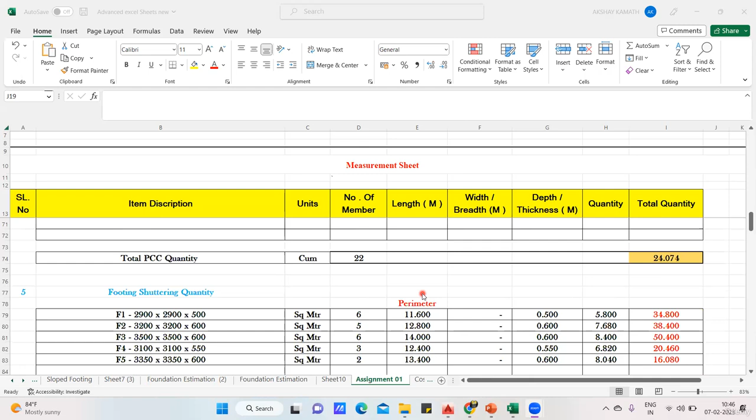Okay, maybe somewhere there was one mistake I did. In case of footing concrete quantity, I had got the answer 40, but I hadn't done the proper calculation. I forgot to multiply these three quantities, so I was getting 40 cubic meter, but the right answer is 129.374. After that I went through all my calculations, and this is the final calculation I've done, and you should get the same answers.

So quickly I'll run through this once. These are the 5 footings I had written. It is earthwork, so the unit should be cubic meter. The numbers are 65632, and this is length, after adding the working space and the PCC offset to that. Depth, thickness, quantity - so excavation quantity is 688.339 cubic meter.

Then after that come to the stone soling. Again, stone soling unit will be in cubic meter. You'll get answer of 36.110 cubic meter. Then we don't have sand filling here.

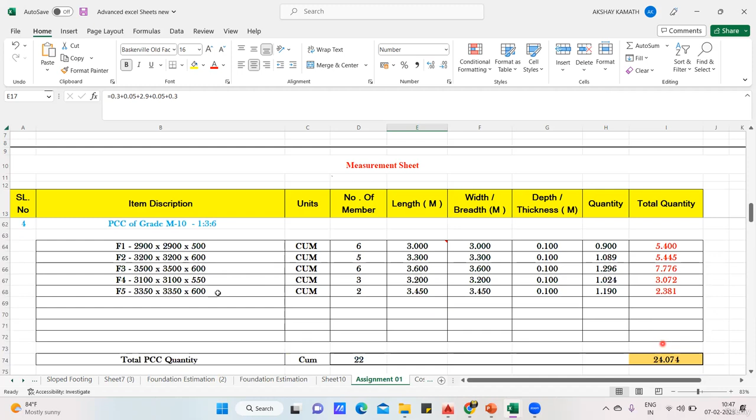Then we have PCC of grade M10, which is 1:3:6. And so here also you'll get the total PCC quantity of 24.074 cubic meter.

Then the footing shuttering quantity will be 160.14. So your perimeter we have got and height we have. So the total area will be 11.6 into 0.5. And based on that, I've done this calculation. You have got 160.14 square meter as my footing shuttering quantity.

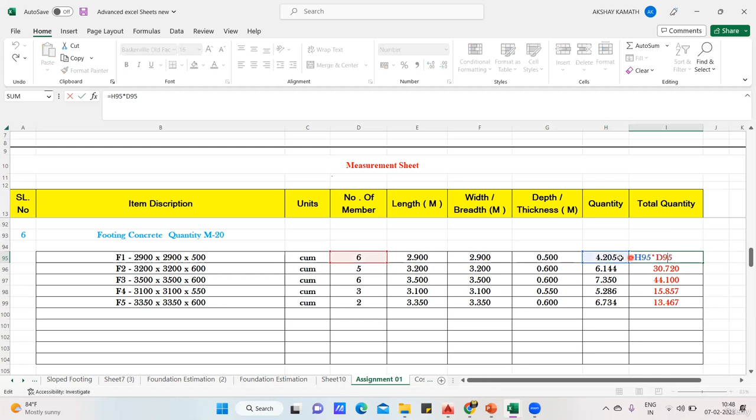Then my footing concrete quantity, again it's a concrete quantity, so it will be in cubic meter. So this is the answer what I've got. Quantity will be 2.9 into 2.9 into 0.5. So 4.205, multiplied by 6 will be 25.230, and when I drag it, I'll get all the answers. So the total footing concrete is 129.374.

Next, in the shuttering work of neck column till the plinth beam top - so here I've written plinth beam top. I've explained how this height has to be taken. So 1.8, then the footing depth I've deducted, and then I've added the depth of the plinth beam to that. With this, I'll get 1.8 into this answer giving 3.240, and the total shuttering will be 3.240 into 6 giving 19.440. If I drag it in this way, I'll get the total shuttering quantity up to the plinth beam top I'm taking. The unit is square meter, so it is 68.670.

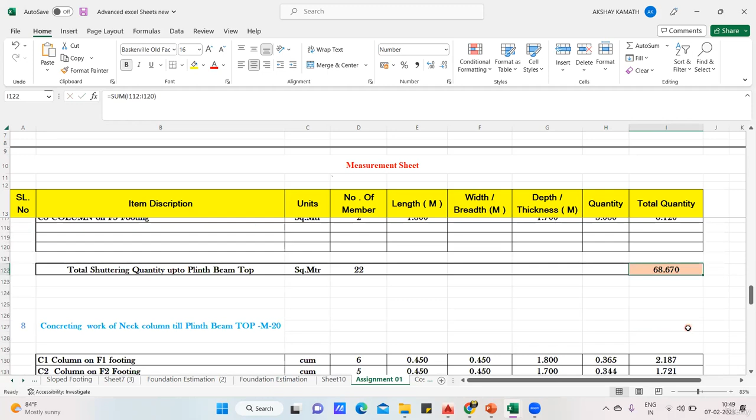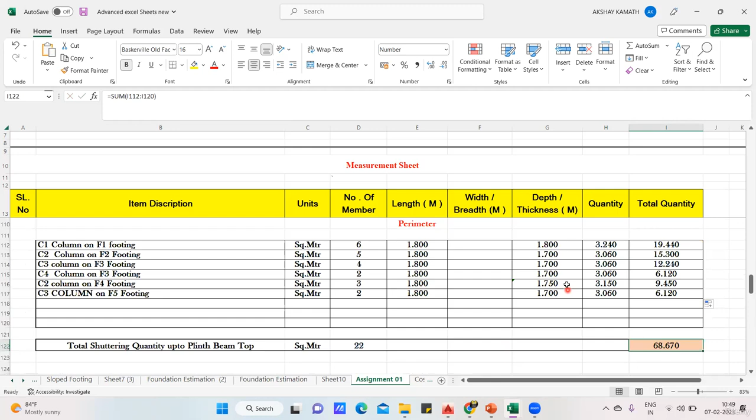Next, once the shuttering is done, we have to do the concreting. Again for the concreting, your foot is this thing. The column size is same here, 0.45 into 0.45, and height is again same. Wherever you do just shuttering, the same height will be your concreting height. So this will be 0.45 into 0.45 into 1.8, and total quantity will be 0.365 into 6. When you drag it in this way, it will make sure it is taking all the answers correctly. So here the total concrete quantity of the neck column you are going to get.

One mistake - not mistake here - I should write cubic meter. Always try to check the units, because while explaining sometimes I may not write it, sometimes I miss it, but that is okay. You people should not do that mistake. So this is 7.725 cubic meter of concrete required.

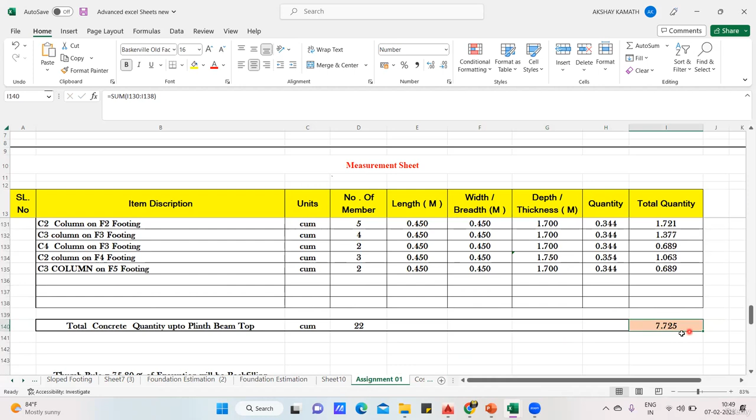So whatever we did now, this is up to the plinth beam top. But if you remember, I told you backfilling we are going to do till the bottom of the plinth beam only, and after that the plinth beam will be casted, then the remaining backfilling will be done. So if you take this concrete quantity also, it's okay, but if you want to be more precise, you should calculate the concrete quantity till the bottom of the plinth beam. So that is what I have done here.

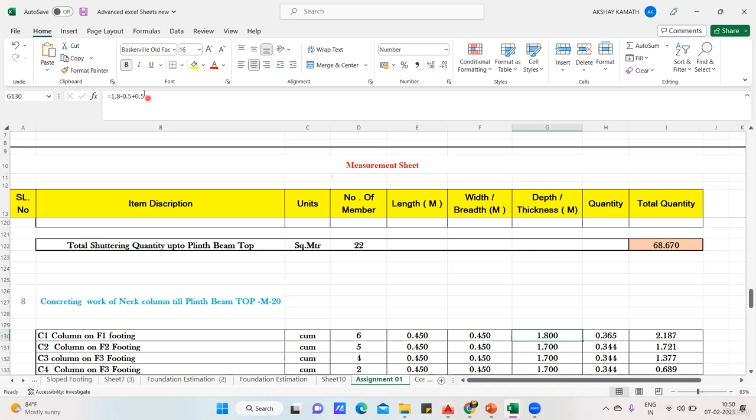So whatever I have written here, this is concrete quantity up to the plinth beam bottom I have taken. So this was top and this is bottom. Nothing will change, everything will remain the same. Only the height point - in the height we had added the depth of the plinth beam, that is 0.5. Everywhere we added 0.5 because this was including the height of the plinth beam. But actually when you do the backfilling, it will be till the bottom.

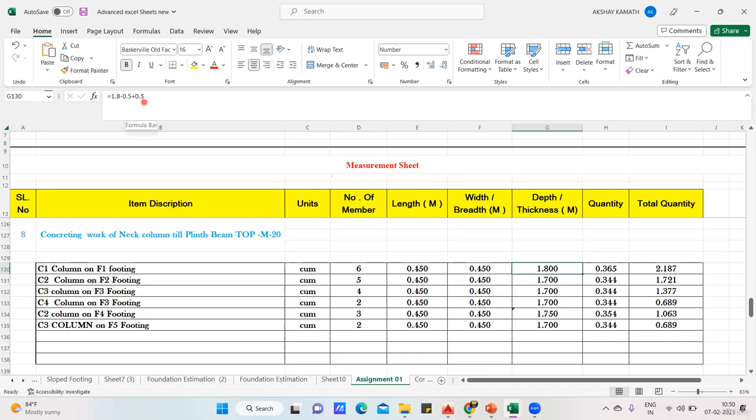So what I've done, from that height I've deducted the 0.5. Here it was 1.8 plus minus 0.5 plus 0.5, so this 0.5 I've taken out. That is why I'm getting 1.3 here. Just do the calculation wherever applicable, deducting 0.5 in all the cases, and accordingly you're going to get the answer. This is the real quantity of the concrete column which will go up to the bottom of the plinth beam. If you want up to the top of the plinth beam, it will be 7.725.

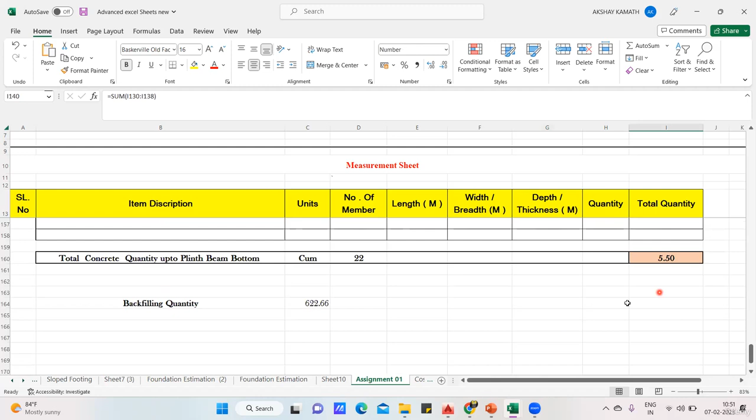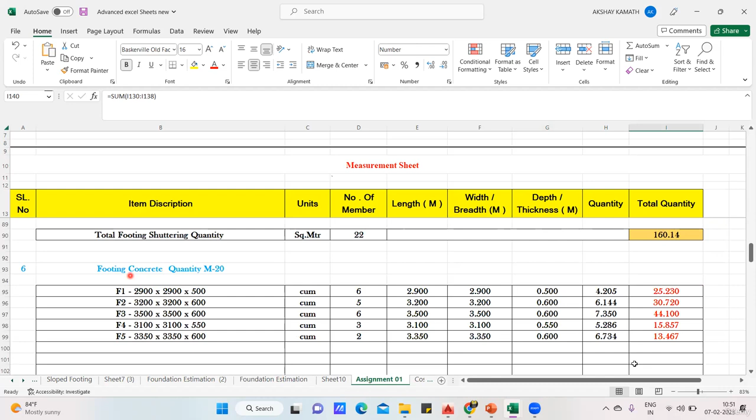That's it. And after that, the backfilling quantity will be how much? Whatever is my excavation quantity - so my total excavation quantity is 688.339. From this total excavation quantity, if I deduct my stone soling quantity, if I deduct my PCC quantity, that is 24, if I deduct my footing concrete quantity, which is 129.374, and if I deduct my column concrete quantity - but in column concrete quantity you should take the one which I've done up to the bottom of the plinth beam, that is 5.50.

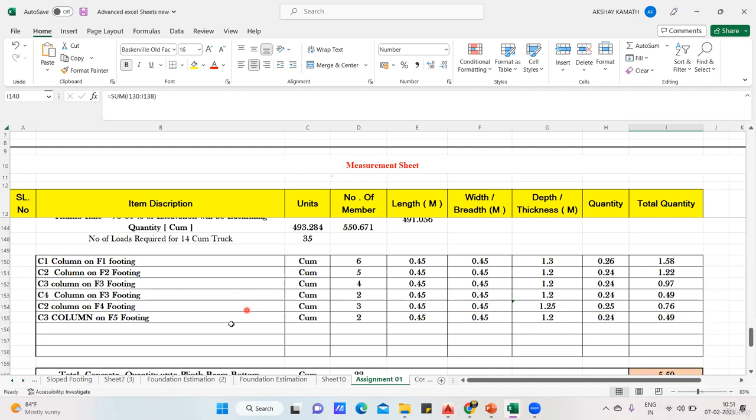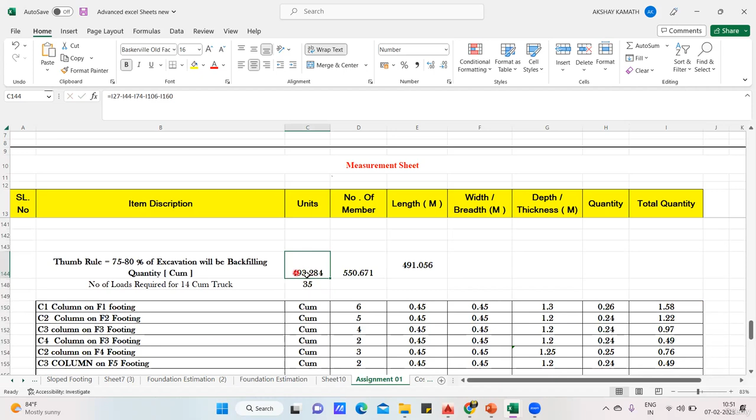So this will be... wait, yeah, got it right. So why is this 491 coming? For 491, I took the column height till the top of the plinth beam, so it is a little less. That is 491. Here the 493 is coming. That makes sense.

And this 550 is what? I've taken 0.8. Even you can take 0.75 also. If you take 0.75, it is coming 516 cubic meter of backfilling. But in practice, what has happened, it has come to 493.

So this is a thumb rule. If somebody asks you, you can say 0.75 to 0.8. One more thing I want to add here.

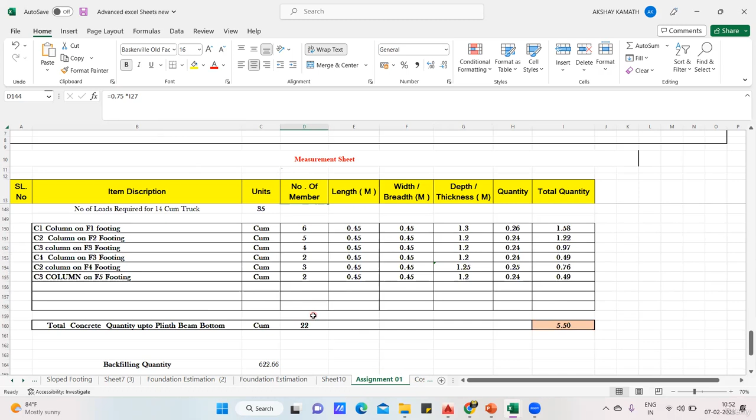Whatever backfilling we have done, this is not a compacted backfilling. You're getting my point? When you do the backfilling, you are going to compact, isn't it? You're not going to directly dump. So whatever volume I have got, this is actually the volume when you do the dumping.

But when you do the compaction, again this quantity will increase. Remember one more thing I didn't explain in the previous lecture: whatever backfilling quantity you are getting, you add another 35% extra to that. This is after the compaction.

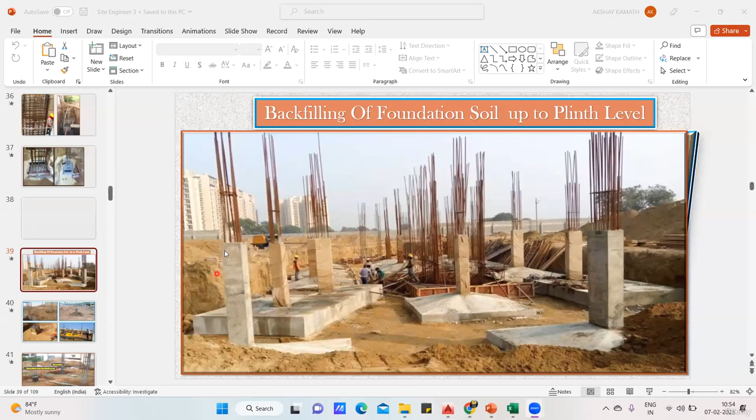If you're not able to understand, let me explain. Once you backfill the soil, it's not that directly you're going to dump the soil. When you're dumping the soil, it will be something like this: you'll dump the soil, do the compaction, then again dump the soil, do the compaction.

In layers, if you remember, we are supposed to do the backfilling. So when you do the backfilling in layers, every time you're doing a compaction, isn't it? That means more amount of soil will go. You're getting my point? More amount of soil will go.

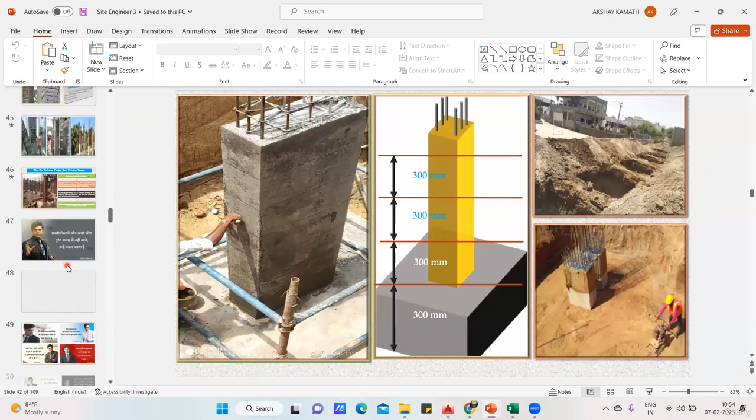But according to calculation, if I come here, it should be 493. But this is actually loose soil, you haven't done the compaction. So when you do the compaction, you can assume a thumb rule.

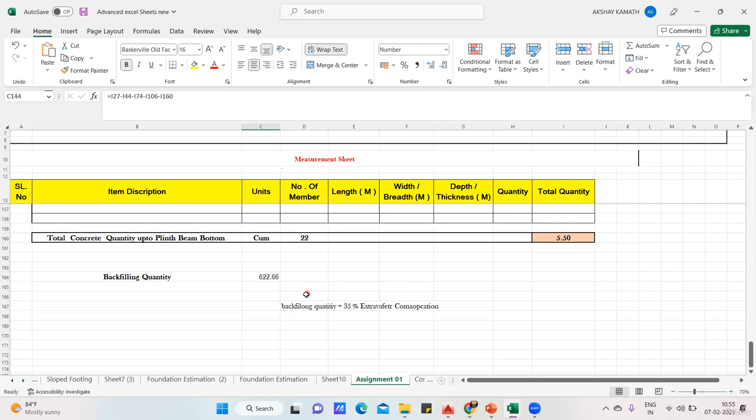Whatever quantity you got, for this again you take 35% extra. So that will be your actual backfilling quantity. That means 493, whatever answer you have got, isn't it?

I'll write here, I'll do it here. Total backfilling after compaction. After compaction, because more amount of soil will go once you do the compaction. More amount of soil it can take, isn't it? So for this I'll write the answer here.

So how can I do this? Whatever answer I got, I'll multiply this by 35, so 1.35 I'll do. 35 means 1.35, so the actual backfilling will be 665 cubic meters of soil will go as backfilling. This is on the paper, but practically on the site, you'll require more soil for the backfilling once you do the compaction.

So why am I taking this 1.35? Because of 35%. Now from where did I get this 35? Again, this has been observed on site for a very long period of time, so people have seen that roughly it's 35%.

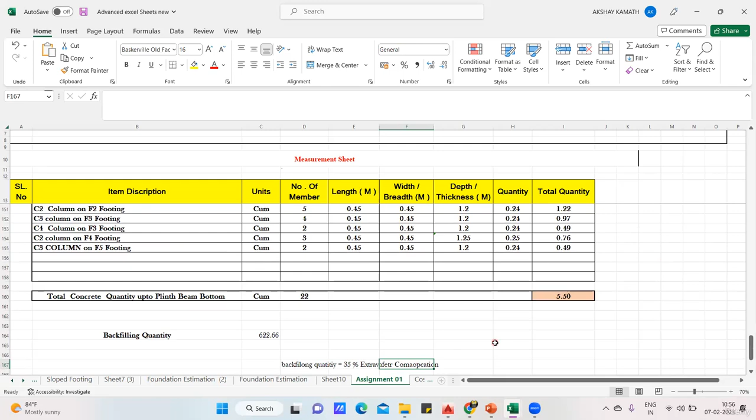Now you may question, should I always take 35? No, you can take 30 also. It depends on the soil also, no? Maybe if you're taking some murram soil or something else, there the compaction may happen enough, I mean more compaction may happen. If you're taking some other soil, the compaction may be little less.

So again, everything is project specific. Since we are doing an estimate, I require a rough idea, so that is why I've taken 35%. You can take 30% also, it doesn't matter.

If you don't want to do the calculation this way, you have another way: take the backfilling quantity plus 35, so 35 is 0.35, 0.35 into this answer, and then close the bracket. You'll get the same answer.

Same answer we got, see, 665 and 665. So this is the normal method we adopted in our school during our school days. If I want to add 35% to this, I'll take this volume plus 35% of this. Instead of that, smart work is you just multiply this value by 1.35, you'll get 665. So this is the real quantity which will go in the backfilling on site.

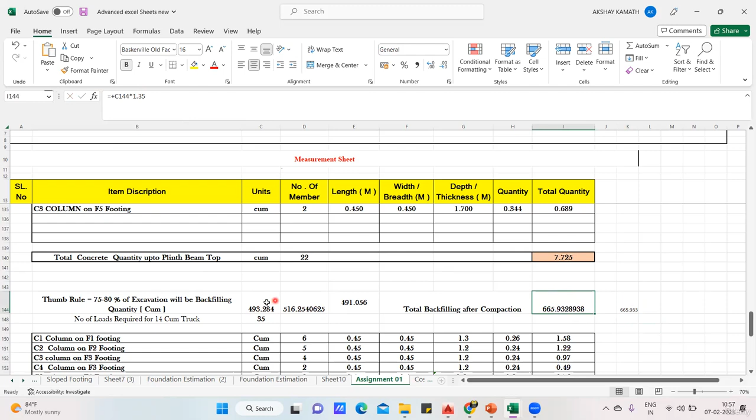This is on the paper. Okay, got it? Great. So in this way, I think we have completed this assignment project, and whatever answers I have shown, that is the final answer.

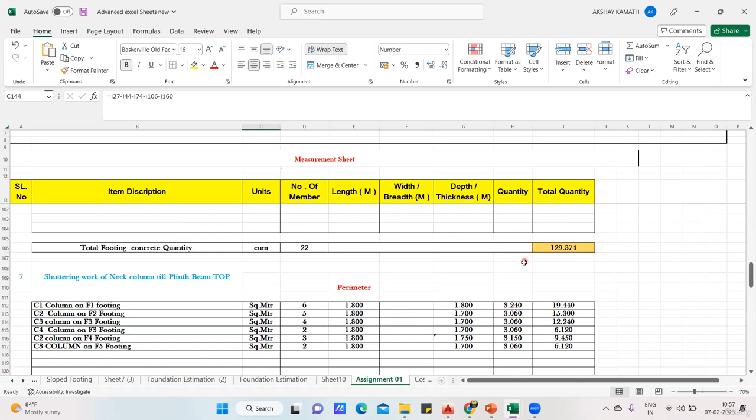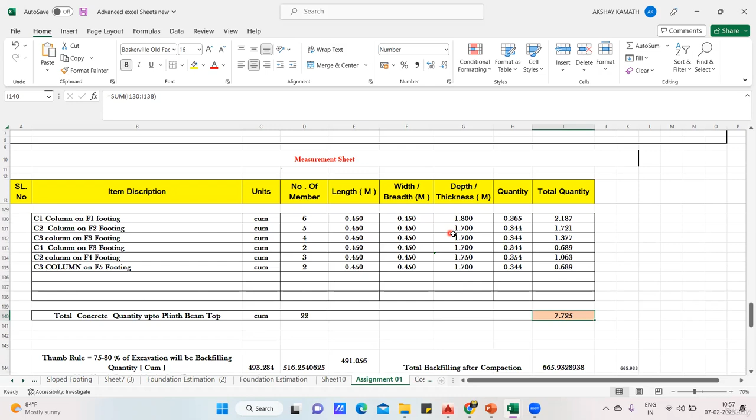After checking all the calculations, I have found that this is the final answer, and you also should get the same answer. If you're getting any answer like 7 instead of 7.725, if you're getting like 7.715, that is fine. That happens due to the decimal digits you're going to take, but you should get the same answer.